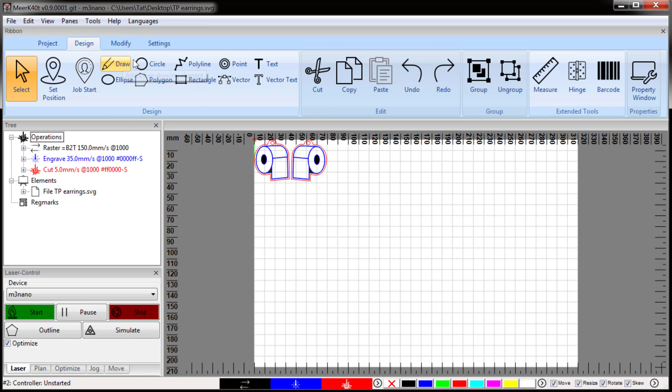Step 2, set up your project. In the Design section of the ribbon bar, you will find various tools to create and edit your graphics. You can use the Modify page to align your designs perfectly to each other, or you can use the on-screen selections to arrange them appropriately.

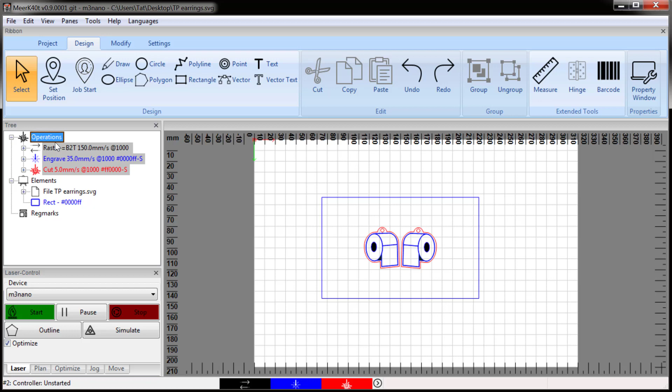Step 3, setting up laser parameters. In the tree and the operations properties, you can adjust power, speed, and other settings. Modify the parameters according to your needs. This will ensure optimum cutting and engraving results. The job will be performed going over each operation with the settings set for that operation in the order it appears in the tree.

Step 4, previewing and simulating. Before sending your design to the laser cutter, it's good practice to review and simulate the job to help you visualize the final result and catch any potential issues. Use the simulation feature in the laser control pane to ensure that everything looks perfect.

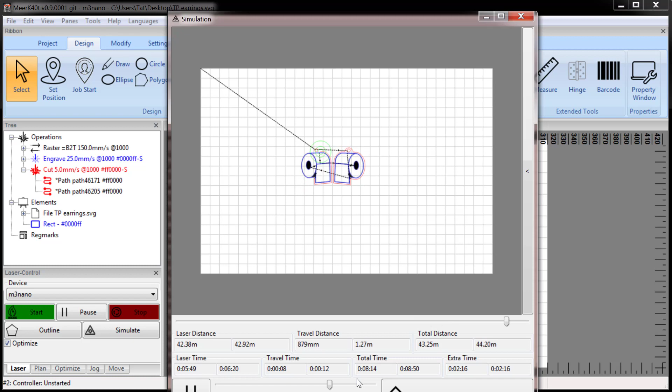When you're satisfied with your design, you can send it to the laser. Step 5, sending the job to the laser cutter. Once you're satisfied with your design and your settings, connect your laser to the computer and make sure it is properly recognized. Then simply click Arm and Start.

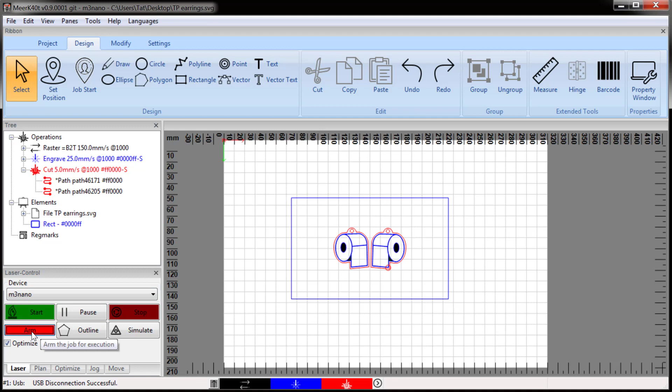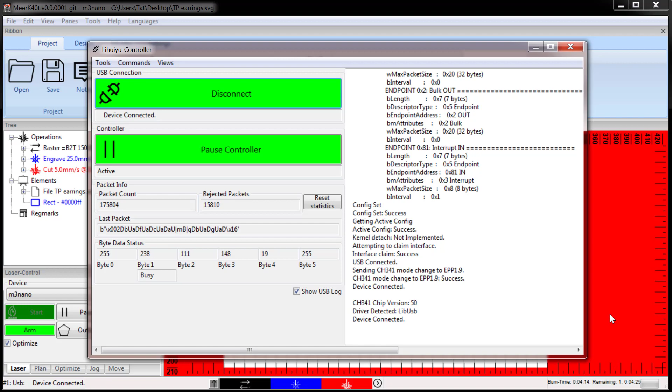Step 6, monitoring the job. During the cutting or engraving process, you can keep an eye on the controller window. It provides real-time feedback, statistics as to how the job is going, and USB controller log. It is essential to ensure a smooth and successful operation. Additionally, you can use this spooler to check the progress of the job as it goes, as well as pause the job if necessary, or abort the job if necessary.

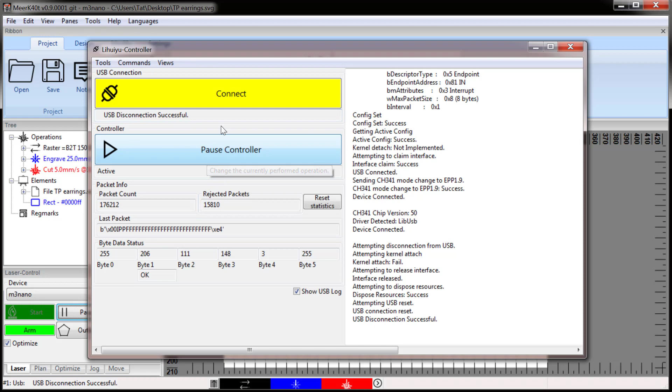Now let's talk about troubleshooting. Even with user-friendly software like MeerK40t, you may encounter occasional issues. Here's a few common troubleshooting tips to help you overcome them. Check your connections. In the controller window, you will have the option of seeing the connection as well as the USB log. When it connects, it will say which driver it was detected with and that the device connected.

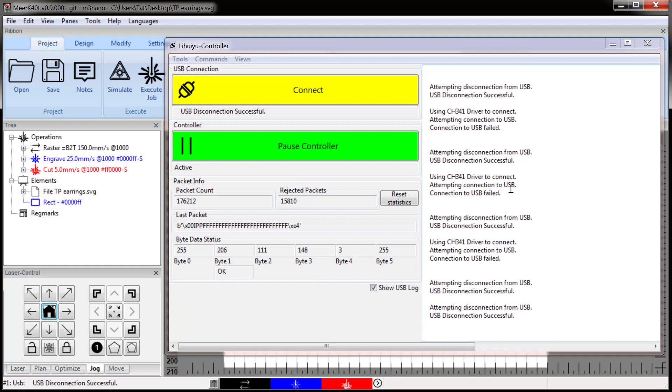You may send small jog commands to your laser in Laser Control in the Jog tab. If you do this, you will see that your laser attempts to connect, and if it fails to connect, it will show the failure in the log until such time as the connection can be safely restored, and it will perform the action given.

If there isn't a physical problem with your connection, then the problem would probably be in your device manager for your device driver. For example, here you can tell I have the libUSB driver, which is located here in the device manager.

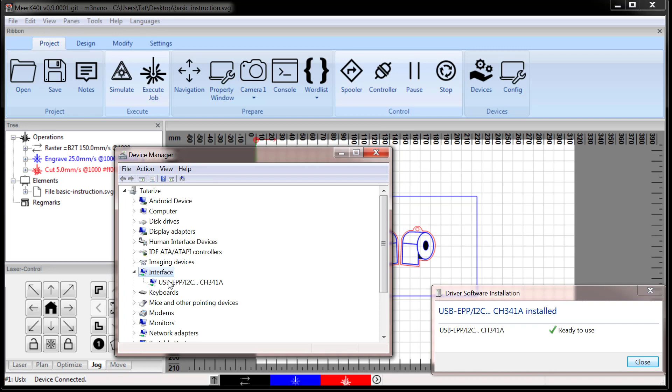This particular driver is compatible with both MeerK40t and K40 Whisperer. The other driver setup is the default Windows driver, the CH341A, which is the chip that performs the USB connection with the card. It appears in the interface under here. This is not compatible with K40 Whisperer, but is compatible with the original Chinese software. However, in either configuration, MeerK40t works equally well. However, the drivers must be correctly installed.

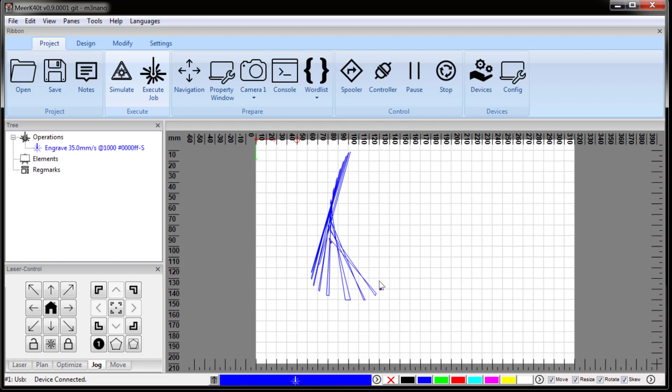Congratulations! You've completed a basic overview of MeerK40t and its essential features. With this knowledge, you're well on your way to mastering the software and creating amazing laser cut and engraved projects. That wraps up today's tutorial. I hope you found it helpful in getting started with MeerK40t.